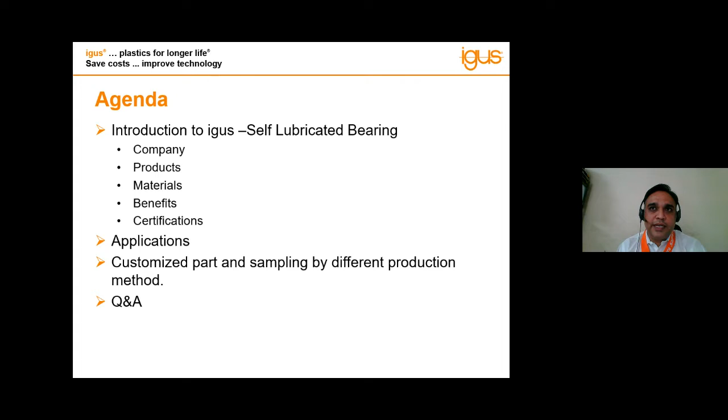In 1964, IGUS was established by Mr. Gunter Blase. He left his job in 1964 and asked his friends and colleagues about their worst problems, where they wanted to improve technology and reduce cost. The same theme we're talking about today is the same thing we started our company with, tech up and cost down. From a peer, he got one application, a metal part which was very difficult to produce, and they wanted to reduce the cost. And we made our first part.

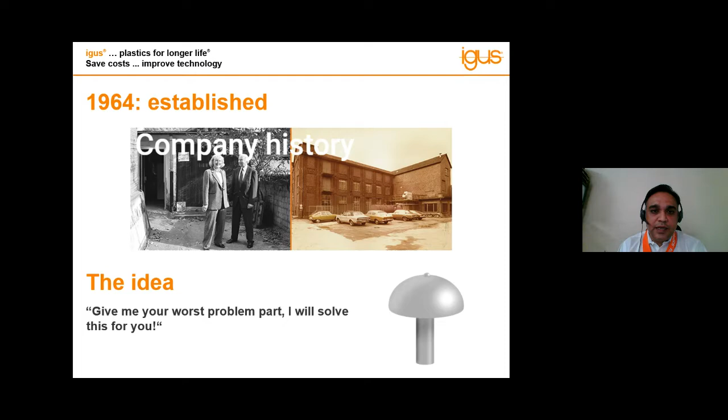Today we can see IGUS has grown by 1,000 times. Our capacity is 930 million bearings per year in production, that's 93 crore parts. Apart from 930 million parts, almost half, 480 million, are going into automotive, into each vehicle worldwide. We are available in 35 countries, with 4,150 employees working worldwide for IGUS. We have certifications like ISO, TS, IATF, and so on.

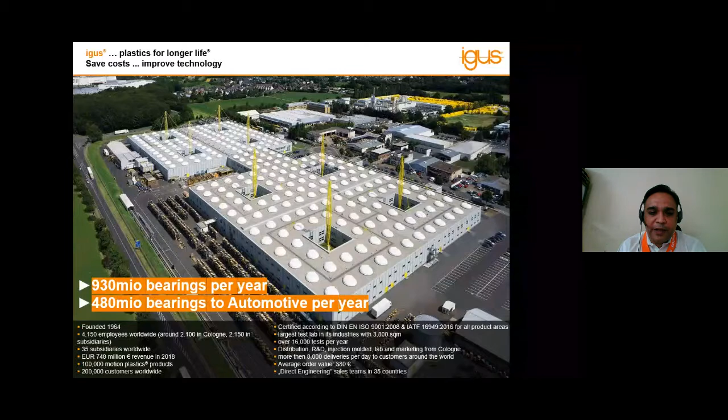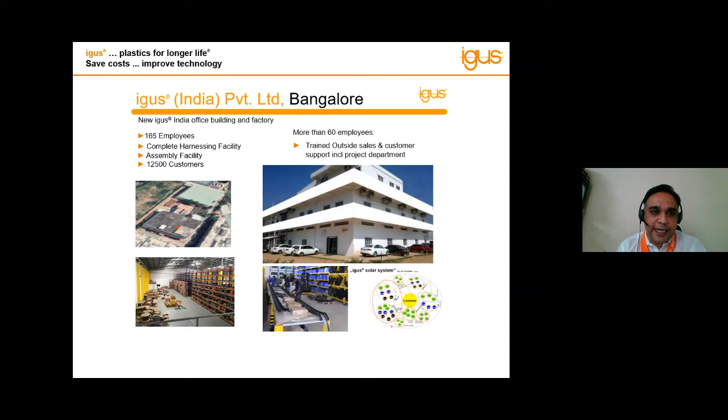In India, we started 15 years back, and today we have 165 employees. Of that, 60 trained engineers are in the field across 16 locations in India to support our customers locally. In our IGUS Bangalore office, we can do assembly, harnessing, stocking, and so on. In India we cater to more than 12,500 active customers on a day-to-day basis. We supply 2 million bearings each month in the automotive industry, with more than 300 applications as of now in the automotive industry for India.

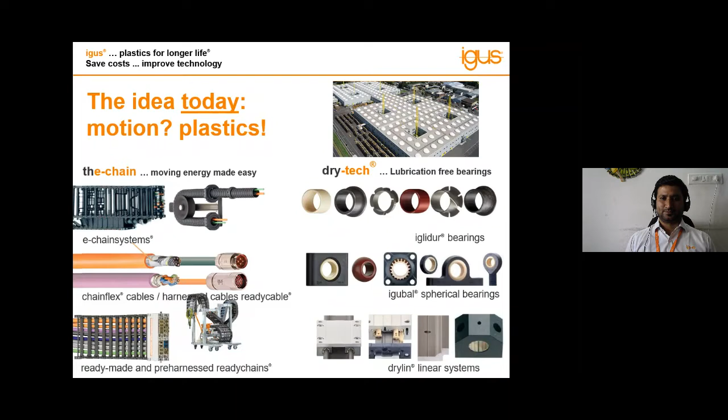We are working in two verticals. On the left side you can see cable carriers, e-chain systems, different kinds of cables, and cable carrier systems. We have applications inside the automotive interior, for example automatic door sliders, automatic seating systems, wiper systems, and it can also help carry your hoses, maybe pneumatic or hydraulic, in material handling and construction equipment.

On the right side you can see the bearing portfolio. We call it Drytech, and it is subdivided into three parts. The first one is the Iglidur bearing, so you can see a lot of bearings with collar, without collar, with slit, without slit. The second one is the spherical bearing - when you are looking for some kind of misalignment adjustment or require some articulation angle, you can go for this product line.

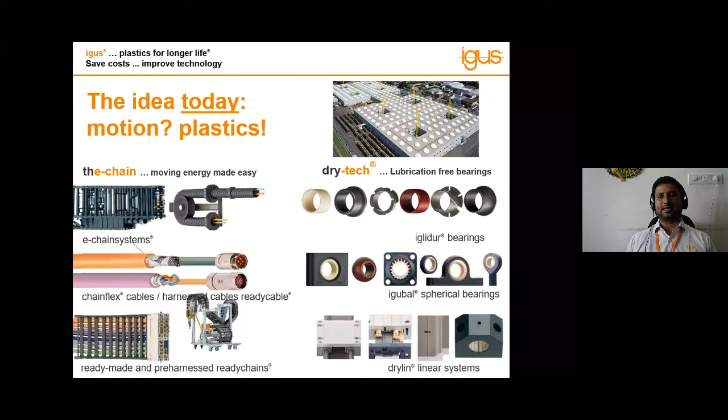The third one is the Drylin linear system. Apart from this linear system, we have lead screws and nuts, with applications inside the interior, like your armrest or back seat mechanism. Secondly, for lead screw and nuts, you can definitely go for actuator applications with the IGUS portfolio.

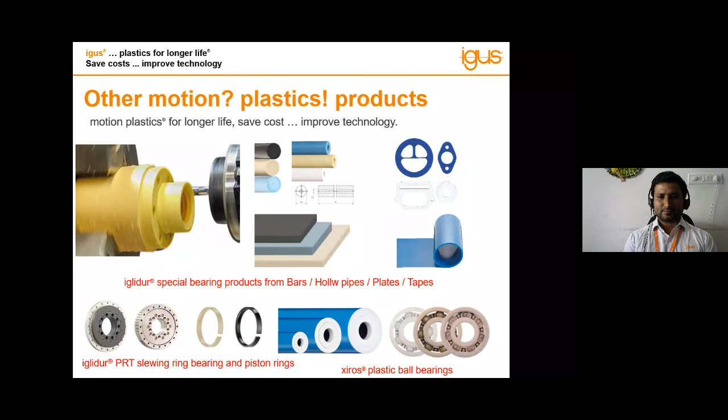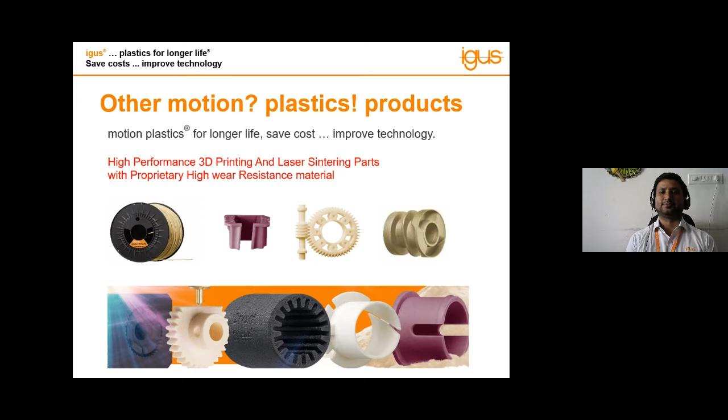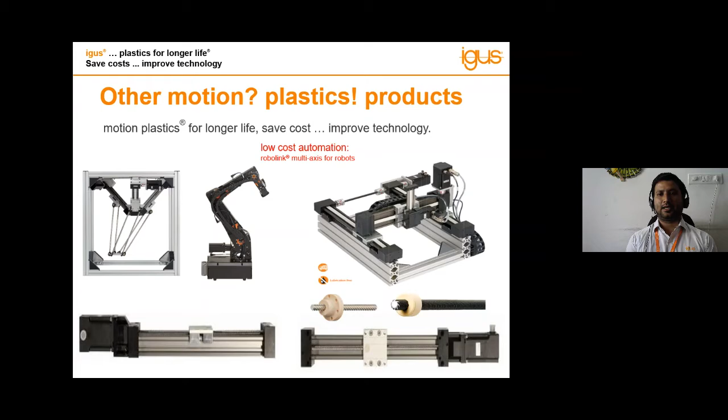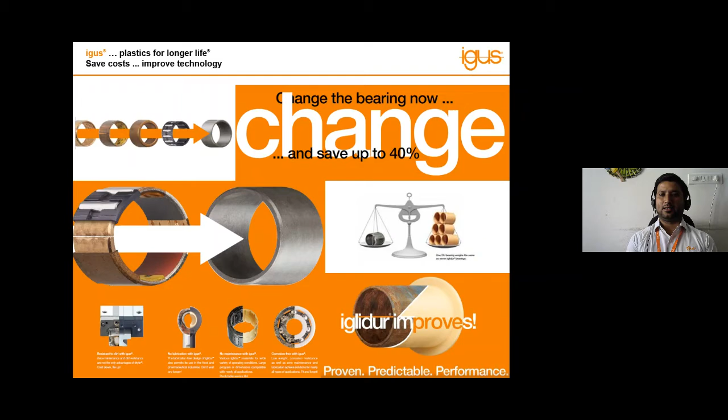Coming to the theme, changing the bearing now. You can see a lot of bearings on this screen - brass, gunmetal, DU, Teflon coated metal back bearing, some kind of needle bearing - and all can be replaced with igus polymer bearing. You get the advantage that these are almost 5 times lighter than any metal bearing solution. Whatever igus provides is absolutely lubrication free, you don't have to put a single drop of oil for lubrication, and being a polymer part, there will be no corrosion problem at all across the life. This is our commitment.

Coming to our composition, we call our material tribopolymer or engineering plastic. Tribopolymer in the sense that we optimize or enhance the properties of generic plastic by adding solid lubricants and mechanical fiber - you can see the microscopic view of our material. By extruding, melting, and mixing this material properly, we ensure 100% homogeneous material across the bearing thickness, and these parts are tested thousands of times inside our laboratory, and only then will it come in the catalog. So you can be sure about whatever igus is offering for any kind of application.

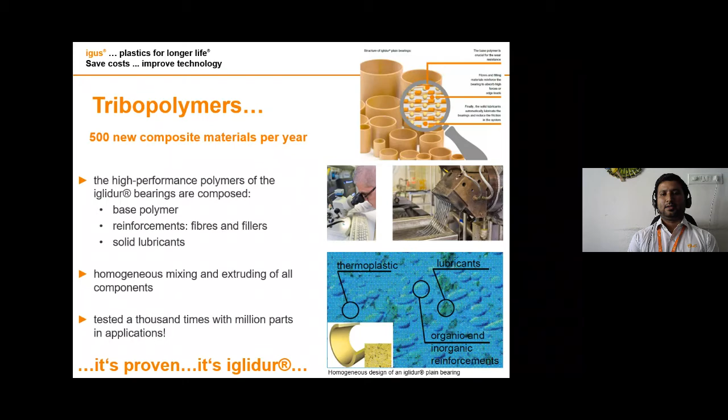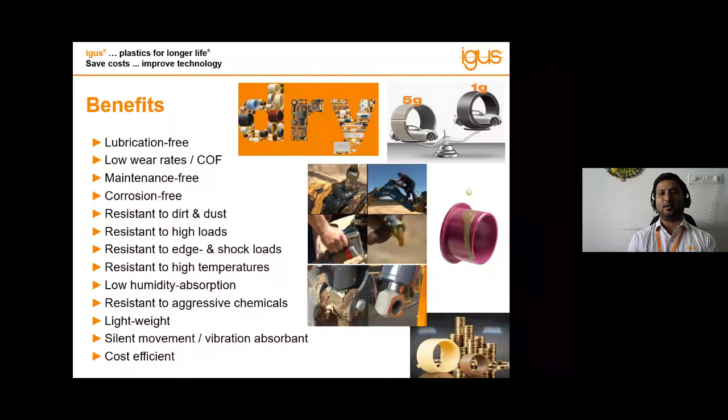So benefits - some points have already been covered, like lightweight, lubrication free, maintenance free, corrosion free, resistant to high load, edge and shock loads, and we have material that can go up to 250 degrees Celsius continuous temperature, and it can also be suitable for media resistance like any kind of chemical or underwater application. In most cases, we are offering a direct cost benefit against metal bearing solutions, which could be really interesting for you.

Coming to the production technologies - injection molding is our core production technology, and for extrusion, making granules, mixing, melting - everything is available in-house. So we are not reliant on any third parties, and we can deliver faster since all this is in our control.

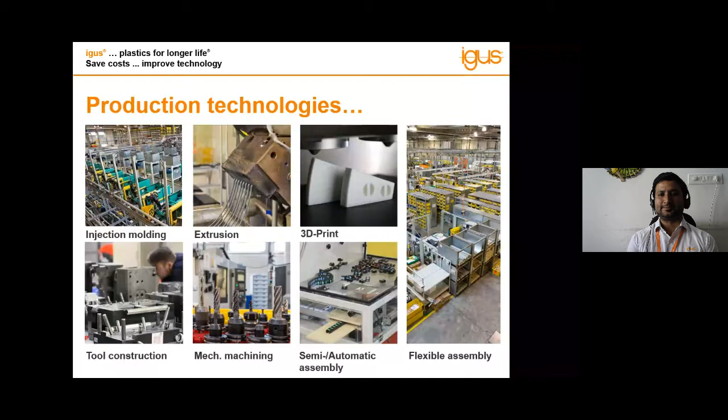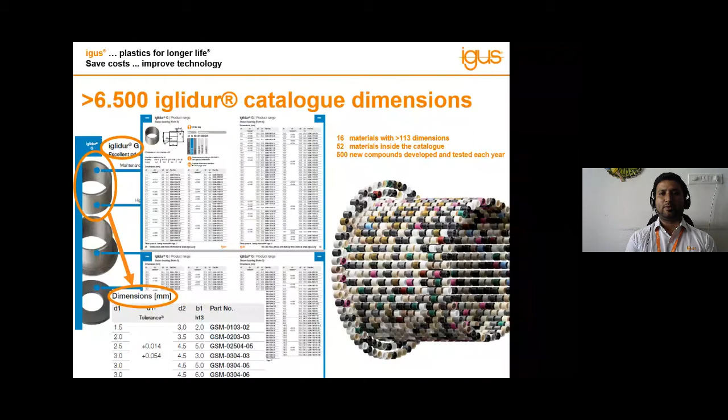Some parts that are not available in the market, you can contact us, we can 3D print for you. Coming to our catalog page, we have 52 materials inside our catalog, and out of that, 16 materials we call the most preferred materials. You will get more than 113 different dimensions from our catalog that are ready to use, and you can just order from us. Starting dimensions from 1mm to 150mm are available in our catalog, and you can use them anytime for your requirements.

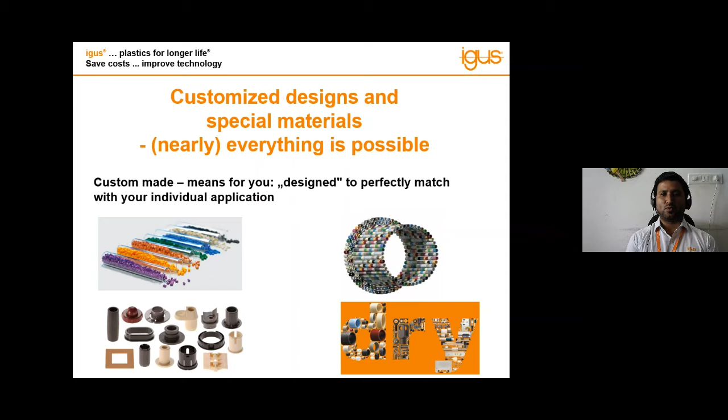In some cases, you may not be able to go for the off-the-shelf part. If you have some specific requirement with an odd dimension or shape, you can just give us the drawing and we can mold for you, provided you bear the tool cost for that. Most of the applications we do in automotive are with customized design only, as per customer requirement, and we have enough experience to make such customized parts as per the customer requirement.

These are the different production technologies - infinite possibilities are there to cater to you as fast as possible. For injection molded parts, 95% of the parts we supply in the market are injection molded. Very few parts, maybe for some customized requirement, we can give as bar plates, as shown in the previous slide, and you can machine as per your requirement, or we can even supply the machined part also. In some cases for validation, you might need 100-150 parts, but you want them from the tooling way only.

So in that case, we can manufacture the 3D printed mold. The same mold can be loaded on the injection molding machine and can produce 100-150 parts for your initial validation. 3D printing is also another way, and aluminum tools are a faster option. This will help you cut short the lead times and provide prototype samples as fast as possible.

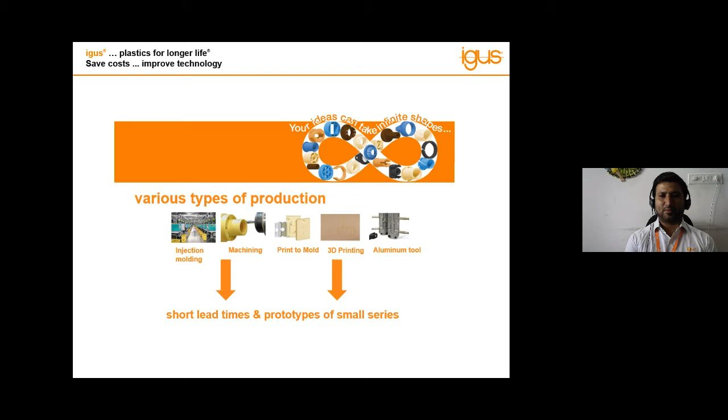For the next slides and case studies, I'm handing over to my colleague, Mr. Annappa Venkatesh. Annappa, over to you. Thanks, Sunil, for giving an insight about all the production processes we follow in IGUS, and the many USPs we can offer our customers. I will take you through different case studies against competitor parts, showing the main advantages we have over them.

The first one is the PTFE coated metal rolled bearing. This is a very common part that most of our customers would have come across. The main technology of these parts is a Teflon layer of 30 to 40 microns, where in the drawing the green colored marked part is the Teflon layer. The backing material is usually bronze or iron.

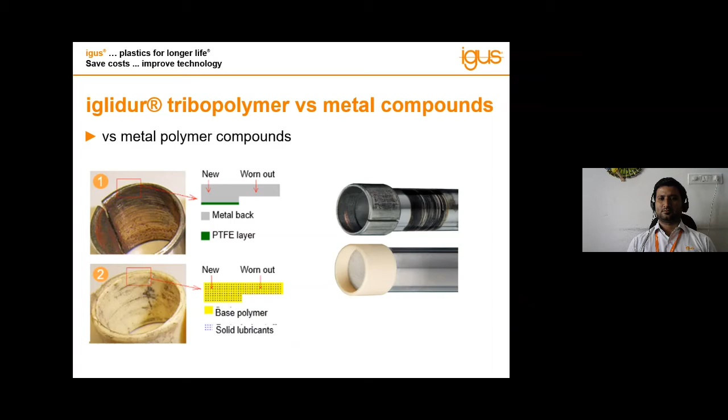The main difference is that once the Teflon coating wears out after a few thousand cycles, the coefficient of friction will gradually increase once the metal backing starts, causing complete damage and scoring marks on the shaft due to increased friction. Whereas with IGUS parts, as Sunil explained in the injection molding production process, it is completely homogeneous and the solid lubricants are evenly distributed throughout the thickness. So the coefficient of friction from the start to the end of the application remains constant, giving you the complete benefit of a self-lubricating bearing with the advantage of no scoring marks on the shaft.

Moving further, the second case study is with respect to bronze bearings. Here you can see in the pictorial drawing a complete disintegration of the shaft as well as the bearing itself. One oscillation test was done at 2 kg per mm square load at 0.01 meter per second with a CF53 hard chrome shaft. In the first column you can see the wear pattern for iglidur G, which is our material. The wear pattern is almost uniform in both cases, the blue one being the dry condition and the orange one being the greased condition.

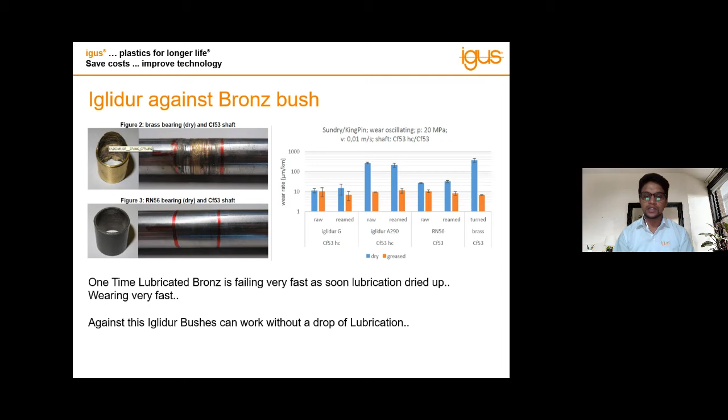Whereas when you move to the last column, for brass, you can see the blue one, the dry bearing, has almost 40 times higher wear compared to our iglidur G running in dry condition. The main disadvantage of these kinds of bearings is that in certain cases where maintenance is not done properly and lubrication is gone or worn out, the coefficient of friction will increase and it will score the shaft, damaging it and ending the application. So we say iglidur bushes can work even without a drop of lubrication, which is one of the main USPs we can provide.

The third case study is with sintered bronze, that is powder metallurgy. Most of our customers know these kinds of sintered parts are much more used in high RPM applications. But when used in oscillation applications, you can see a test performed at 3 MPa, which is very low load, 0.3 kg per mm square, at 0.18 meter per second at room temperature condition. The part shows complete disintegration from the first figure to the last, with no material left.

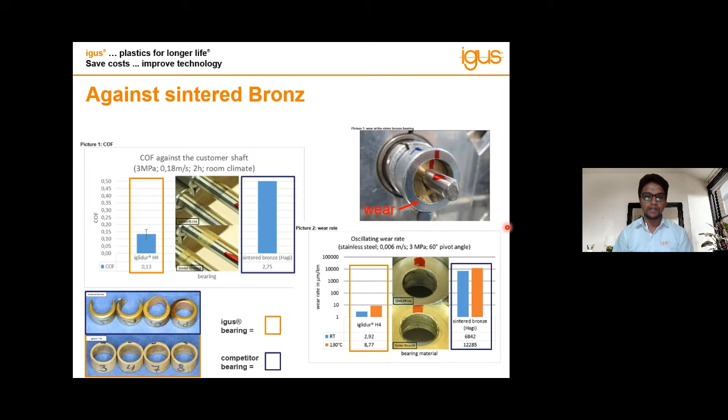I can give you examples where these kinds of sintered bronze are still used in wiper applications under higher oscillations, whereas with IGUS parts we can completely save the shaft from material damage or damage to the part itself. This is another USP we can offer over sintered bronze.

Moving further, this is a special case IGUS can offer you as a conductive bearing. These kinds of bearings are needed, for example, in hinges for car doors, tailgate hinges, hood hinges, where the part has to go through e-coating, that is electrolyte dipping in the painting process, so the part has to be conductive. IGUS can offer you these kinds of special bearings as well.

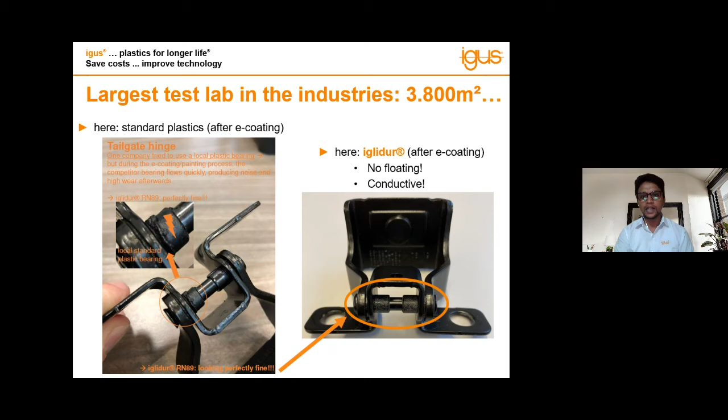The case study here has been done with a normal injection molded plastic or local plastic, where you can see the part has disintegrated or deformed in the painting heating chamber. Whereas with our part in the second drawing, it is completely intact, with no floating, and it is working absolutely fine. This is another special feature that IGUS can offer.

Moving further, I would like to take you through the heart of our main factory. This is the test lab, which is spread almost close to the size of a football stadium, where 16,000 tests are being performed, and out of them 12,000 Tribo tests are being performed on Iglidur bearings.

All kinds of tests like oscillation, rotary, linear, and combinations of linear and oscillation with different loads, temperatures, and different shaft materials are performed, in millions of cycles, to come up with data on what will be the wear of the parts at different parameters.

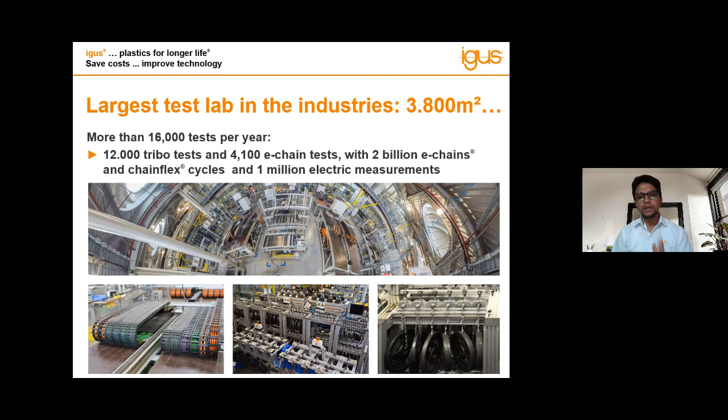So we can directly correlate this to our expert data, which will give you precisely what will be the wear of the part even before the start of the application. I would proudly say this is one of the main USPs that nobody could offer apart from iGus. And yes, we can also do customized tests for our customers.

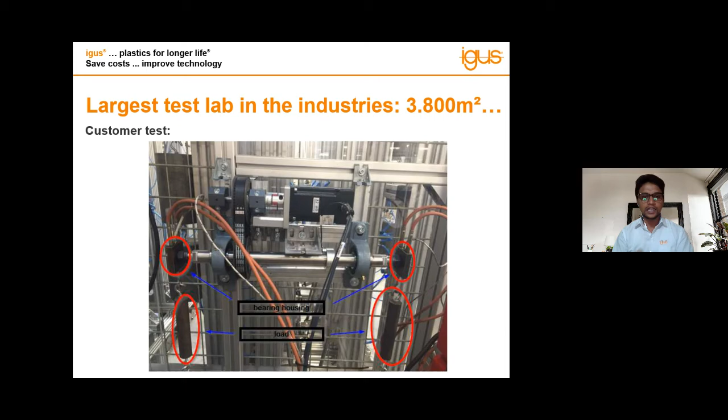This is just another demonstration of what we have shown. If the customer is willing to give their shaft materials and let us know the load data, the temperature, the mating materials, we can replicate the test in our test lab, and give you the test result much before the start of your application.

Moving further, with the continuous evolution in the automotive industry, which demands all stringent certificates, we are equipped with all the latest certificates - DIN, EN, ISO, IATF, and furthermore IMDS, REACH, VDA, fogging, burning rate. So all these latest certificates are available, and we are on par with the evolving automotive industry.

Furthermore, I would like to take you through the optical control or optical sorting machine. As Sandesh said in his earlier slide, out of all the 480 million parts - that is 48 crore parts - which are going to the automotive industry, all are passing through this optical control.

Any kind of deburring or molding defects observed in this optical control machine will be directly kicked out, and the parts that are going to our customers are 100% defect free.

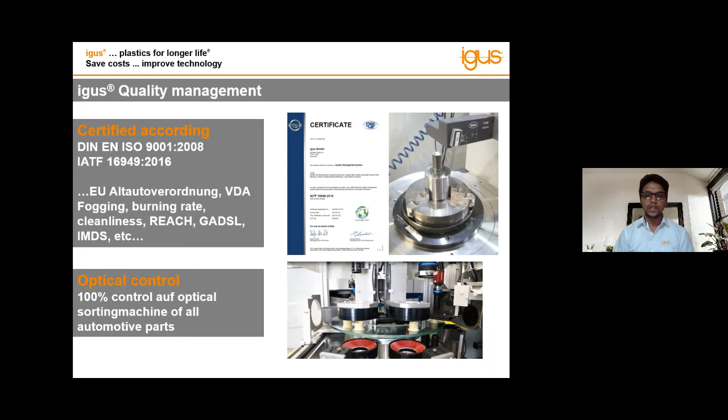With this, I would like to hand it over to Mr. Vaibhav Thavre, who is looking after North Automotive Sales, and he will take you through all the automotive applications that we are doing in different automotive segments. Over to you, Vaibhav. Thanks, Anappa.

Now I will take you to the possible applications in the automotive industry, starting from applications in cars, from very easy applications like mirror adjustment to tough and complicated applications like shift forks inside gearboxes and suspension applications. We will see these applications in upcoming slides one by one in detail.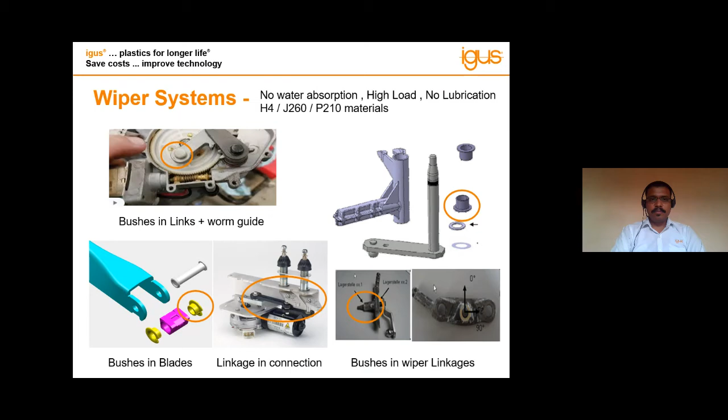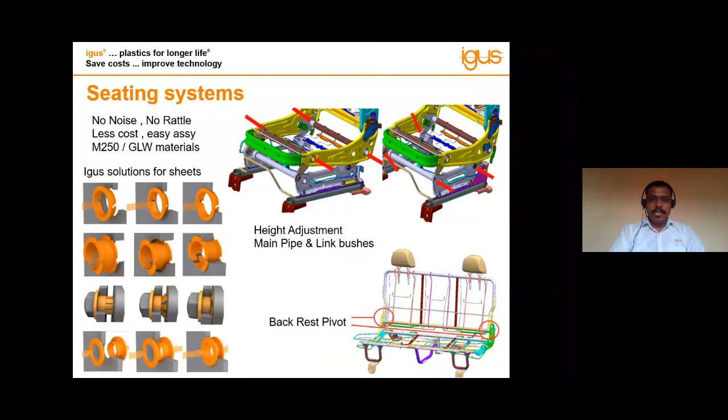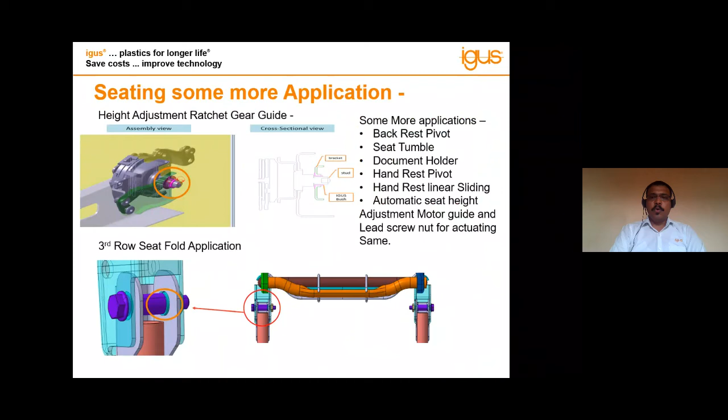In the next slide we will see further applications in seating systems like back rest pivot, seat tumble application, document holder application, hand rest pivot, hand rest linear sliding, automatic seat height adjustment, motor guide and lead screw nut for actuating the same. That is also possible.

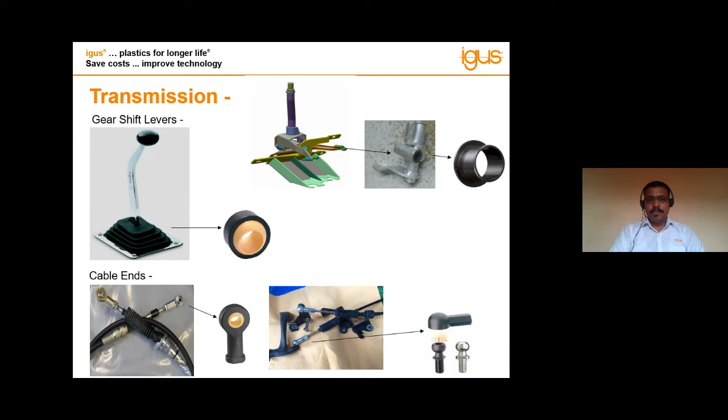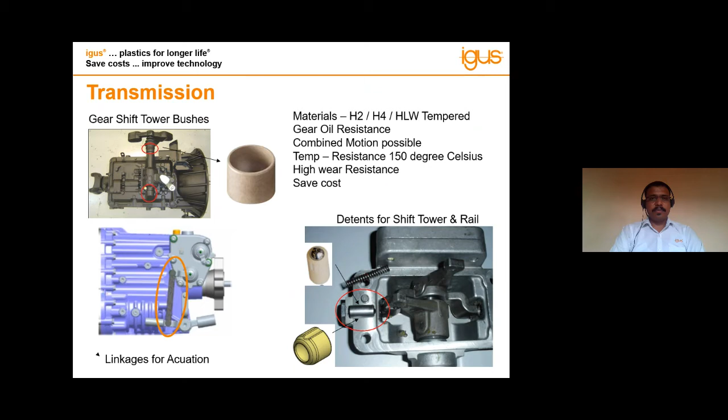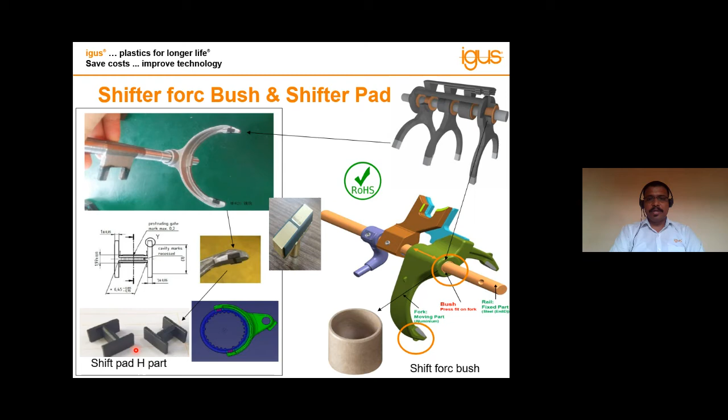Moving on to further application of shift fork shifter pad bush. In shifter pad bush, conventionally people are using ultrasonic welding process or plastic overmolding process or molybdenum coating, which has serious issues when we come across RoHS compliance. All our Iglidur materials are RoHS compliant. You can see a special part looking like a capital H letter. It can be easily pressed in the shifter fork end.

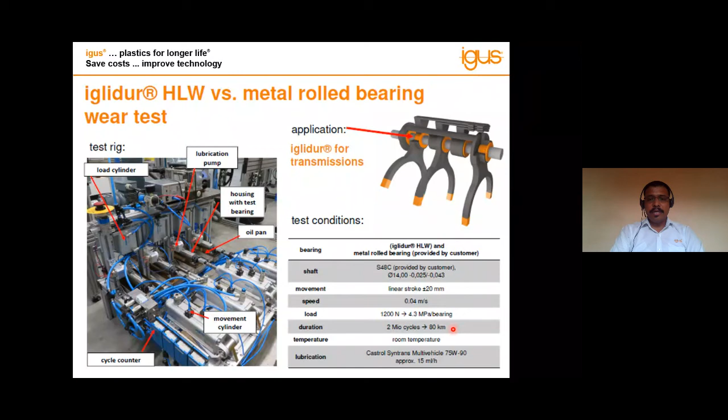One more case study of Iglidur HLW material versus metal rolled bearing. This wear test we conducted for a special linear stroke of plus minus 20mm at speed of 0.04 meter per second, load 1200 Newton, roughly 4.3 megapascal per bearing, and we tested it for 2 million cycles. When we convert it into linear travel, it is around 80 kilometers.

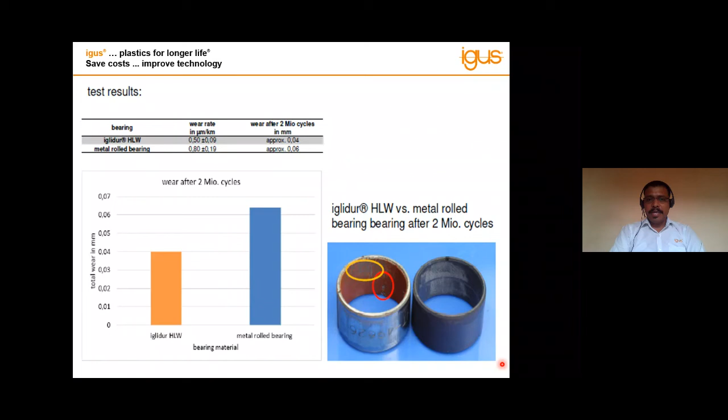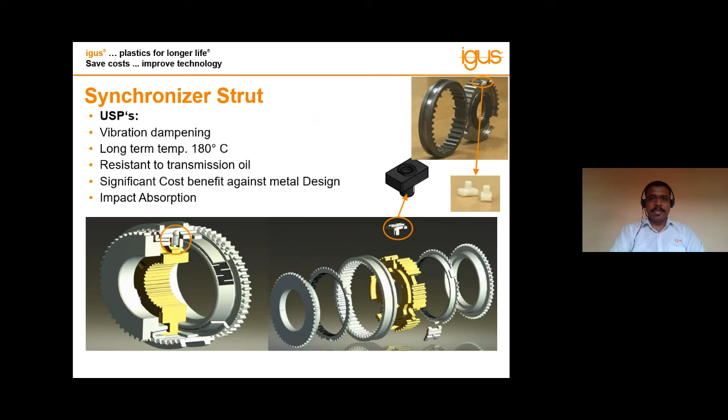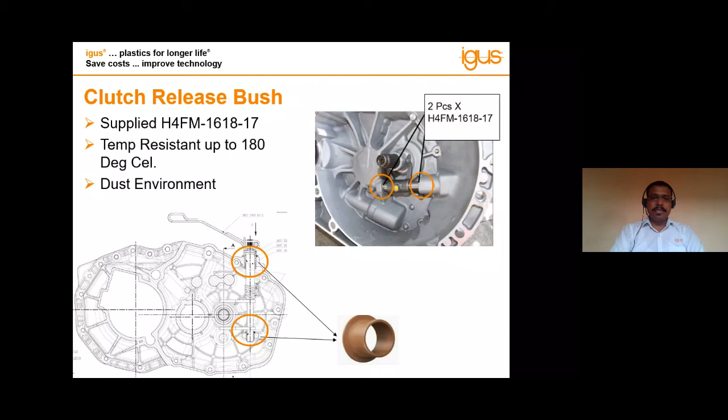Clutch release bush application with Iglidur H4 material because of temperature resistance up to 180 degrees Celsius plus resistance to dirt.

Applications in hinges. We have special Iglidur materials which offer electrical conductivity, required for the e-coating process, with economical cost, high load taking capacity, and higher wear resistance. We offer Iglidur materials for hinge applications. Hinge application possibilities are rear boot hinge, side or back door hinge, and spoiler hinge. You can see in the image a special design in Iglidur RN89 material, which is one of the electrically conductive materials.

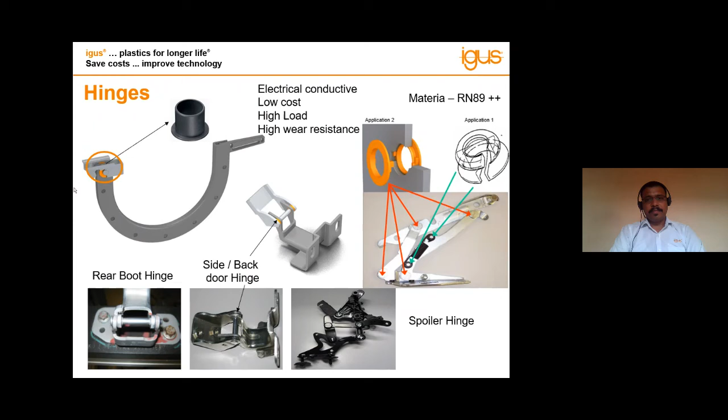Applications in steering column bush, lock stop liner bearing, steering yoke support bush, and bush in dust cap on firewall, with benefit of low friction, high wear resistance for linear as well as rotational motion. Plus, by using special designs, we can reduce noise levels in the application.

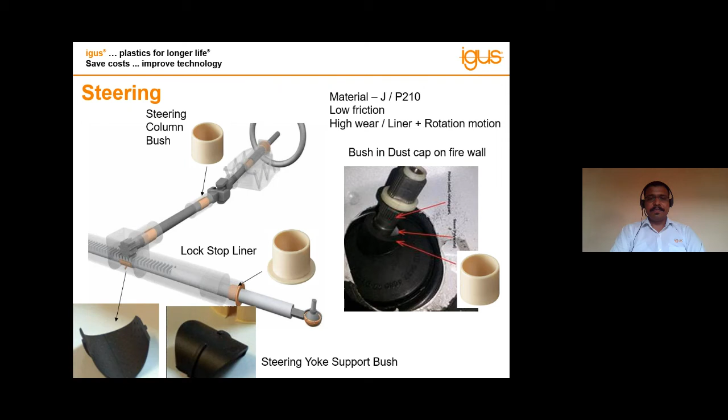Some applications near the engine area: belt tensioner application, variable air intake valve application, throttle valve body bushes, exhaust gas recirculation bushes, linkages for actuation of valves. Higher temperature materials can be used here, again Iglidur H family.

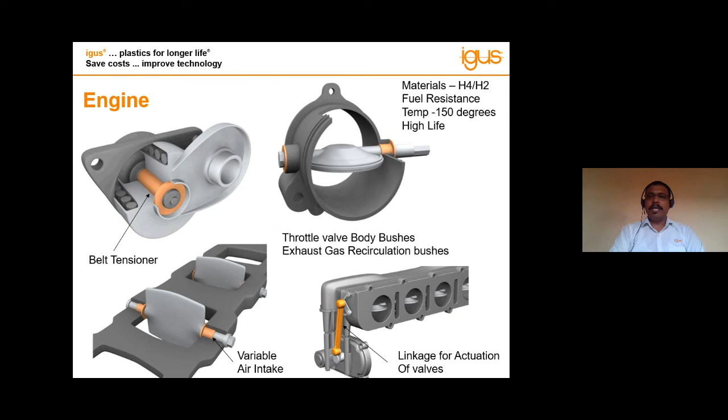Headlamp beam adjustment application, a special part with spherical OD, as can be seen in the image. No noise, no lubrication, lightweight, and very high life and temperature resistance up to 120 degrees Celsius are the key points here.

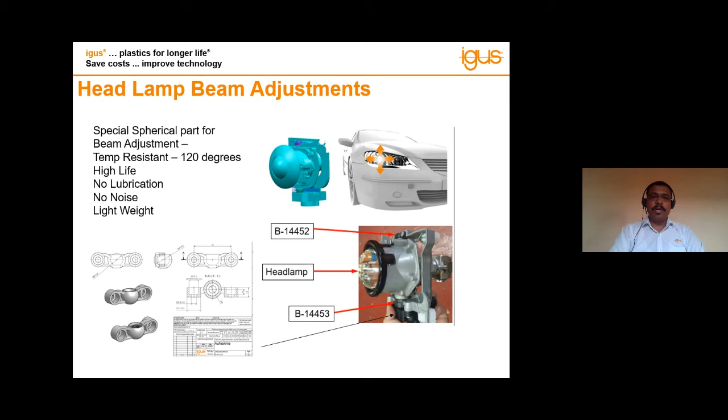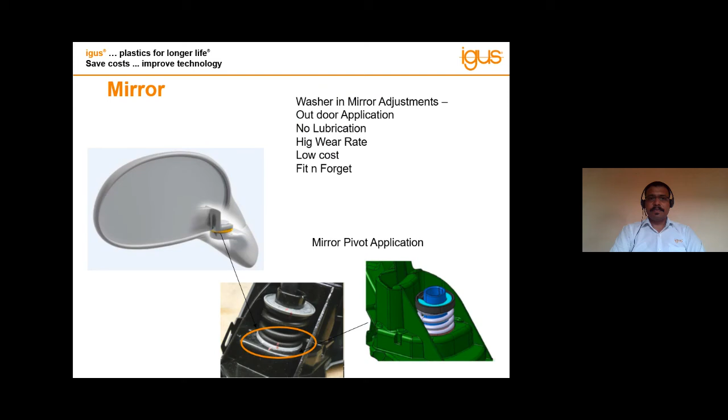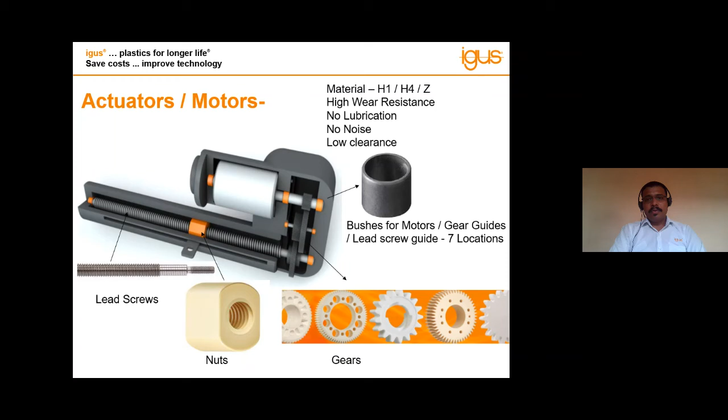Further applications inside actuators or motors. As we've seen in the product line, we have special lead screw nuts available, made up of Iglidur material. That's why no lubrication is required at all throughout the life, plus no corrosion, no rusting. We can also give bushes for motors as well as for gear guides.

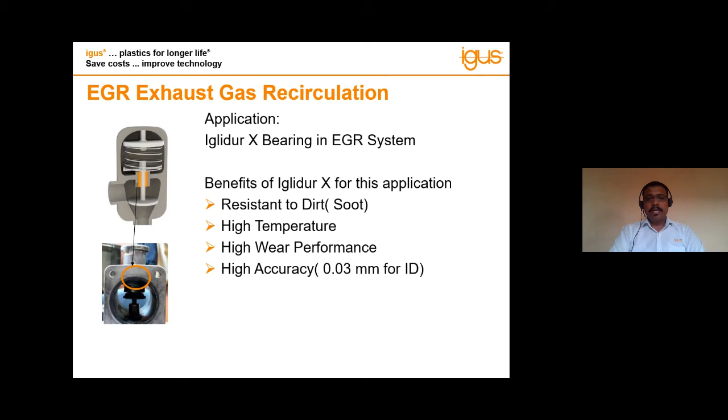EGR exhaust gas recirculation application. We can do this application with Iglidur X bearing. Major benefits are resistance to dirt, especially soot, high temperature resistance, high wear performance at such higher temperatures, and higher accuracy levels like 30 microns for inner diameter.

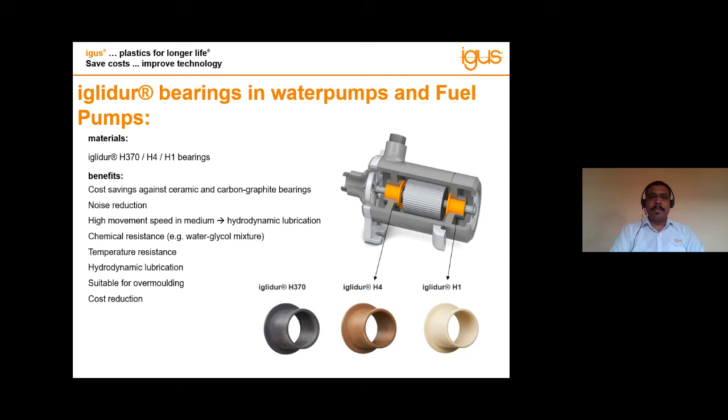Further applications in water pumps and fuel pumps. With the Iglidur H family, we can do these applications, as this material has resistance to chemicals like water glycol mixture, and when hydrodynamic lubrication comes into picture, these bearings can take really high RPMs like 5000, 6000, 8000 RPM. Such high RPMs are also possible with Iglidur bearings, with cost savings compared to existing solutions like carbon bearings, carbon graphite bearings, ceramic bearings. Yes, it is possible.

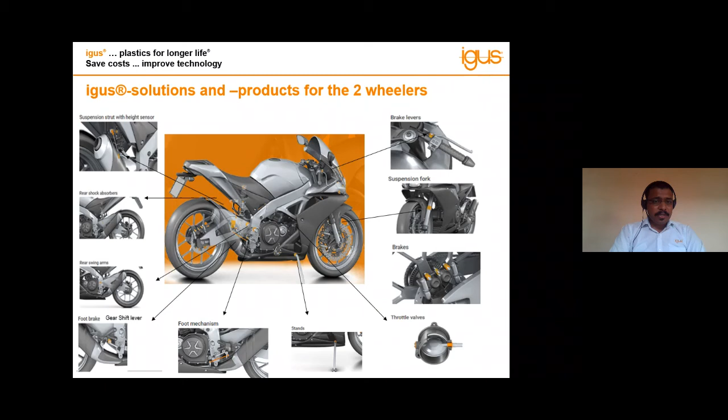Application overview in two-wheeler industry: brake lever application, suspension fork application, brakes application, throttle valves, stands, foot mechanisms, foot brake, gear shift lever, rear swing arms, rear shock absorber, suspension strut with height sensor. These are some applications in two-wheeler industries.

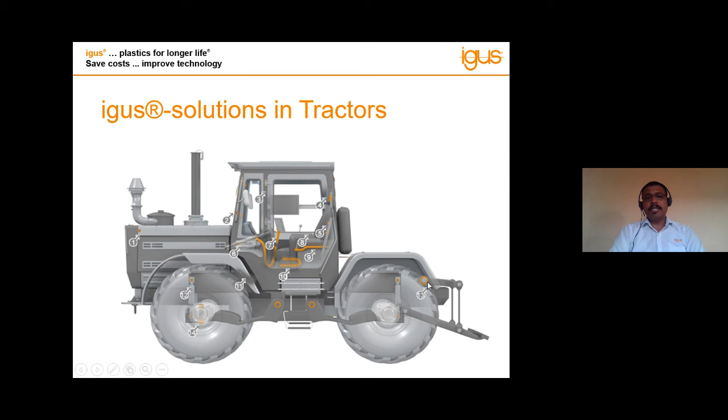Further applications in tractor interiors: all types of levers like auxiliary lever, hand accelerator, speed lever, range lever, differential lock lever, shuttle lever, forward reverse lever, IPTO lever, PCDC lever - all types of levers we can easily do with Iglidur bearings. The benefits are resistance to outside environment; they can be openly used in outside environments.

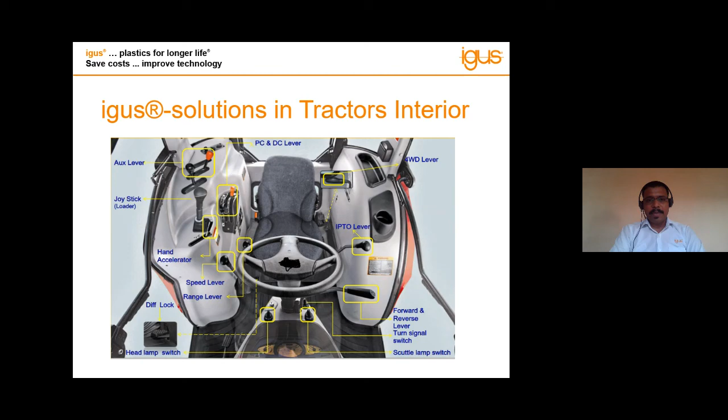In these COVID-19 tough times, to continue our engagement with customers, we are all available to assist you via virtual support. Our entire team will always be available over phone, email, and virtual platforms for consultations at any point of time. If you need specialized product training, specialized application training, or basic product training, yes, we are all available and can do it at any point of time.